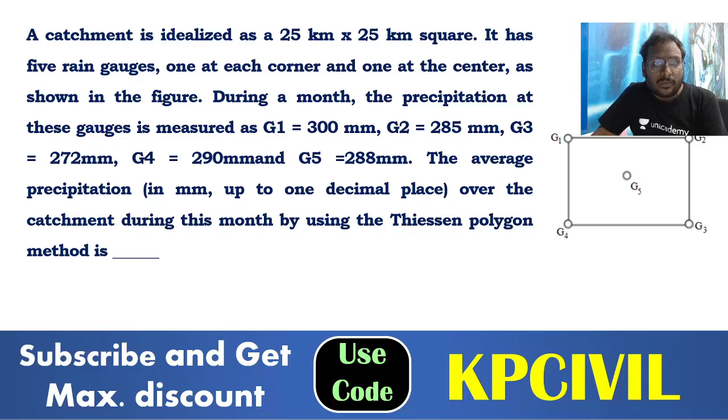2016, 17 and 18 irrigation engineering previous year questions. Why all 3 years combined am I giving? Previously we did each year individually - 2019 one video, 2020 one video we have done. But here we are combining 2016, 17, 18, all 3 years, 6 sets, each year 2 sets. In civil engineering paper, irrigation engineering, across all 3 years combined, they gave only 5 questions from it. So one small video is enough for us. So not individual years, we are doing combinedly. 2016 to 18 irrigation engineering, civil engineering, previous year questions of GATE solutions we are doing.

Coming for the first question, the intensity of irrigation for the Kharif season is 50%. I am writing percentage in fraction, 0.5.

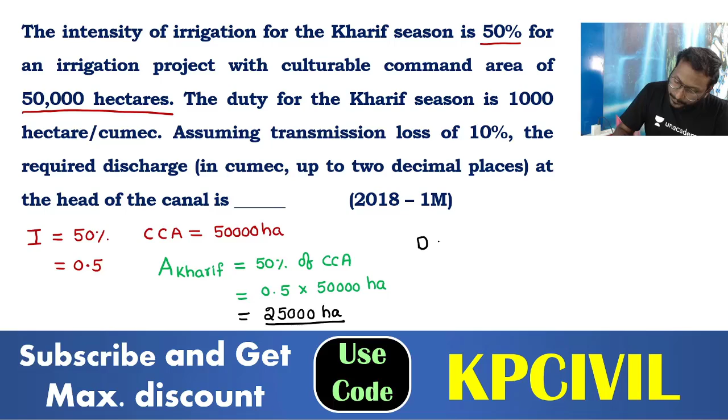Duty for the Kharif season is 1000 hectare per cumec. Assuming transmission loss of 10%, required discharge at the head of the canal - means canal has started the journey. Consider this is the head of the canal. Water is traveling through the canal and delivered at the field. Water started at the head is 100%. During the journey, losses occur because of conveyance losses or transmission losses. The losses may include evaporation loss, seepage loss, runoff loss - these conveyance or transmission losses are given in the data as 10%. So it is delivering 90% at the field.

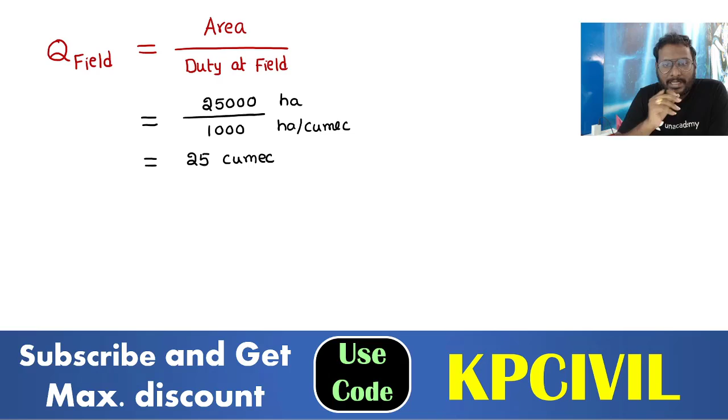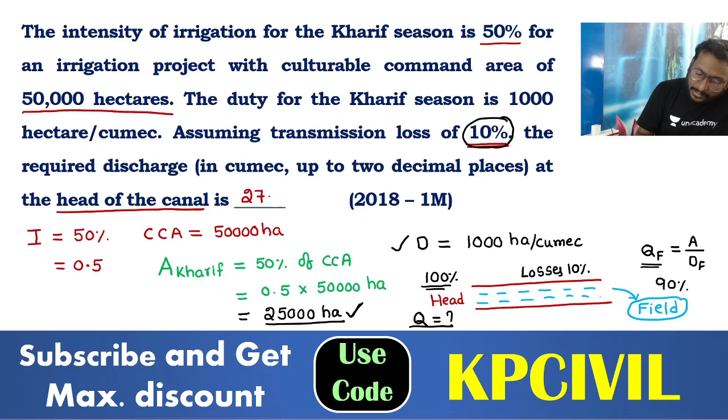Now this Q field is 90% only, which is 25 cumecs. Q head, how much is Q head? Q head is 100%. 90% value is 25 cumec, what is the value of 100%? 25 into 100 by 90 - 90% is 25 cumecs which is discharge at field, 100% is discharge at head. 25 into 100 by 90 will give the answer. Calculate it: 27.78 cumec. So up to 2 decimal places, we need the answer: 27.78 cumec.

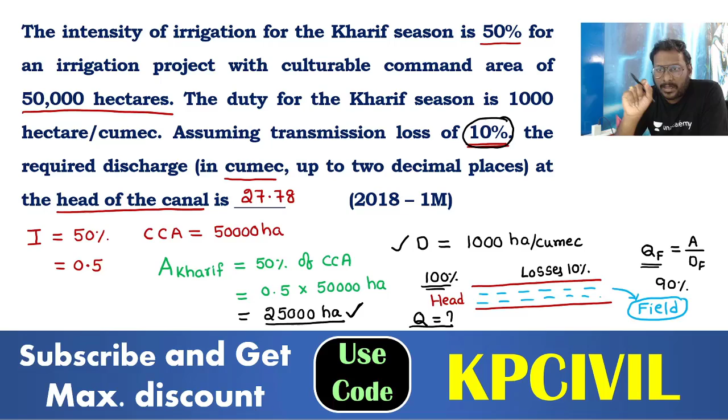Clear? One by one, step by step. First 50% of cultivable command area is taken. Then area for Kharif is obtained. Then analysis: water started at the head as 100 liters, received at the field with loss of 10 liter, so 90 liter. So discharge at the field is equal to area by duty. Then discharge at head is equal to 25 into 100% by 90%, giving 27.78 cumec.

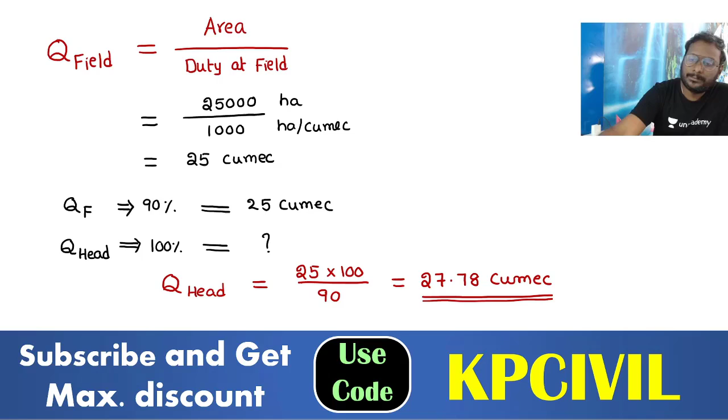Next question. This is 2017, 2 marks question. The previous one was 2018, 1 mark.

Cultivable command area (CCA) of canal is 10,000 hectares. The area grows only two different crops: rice in Kharif season, wheat in Rabi season.

Write down: rice in Kharif season, wheat in Rabi season. Two crops in two different seasons they are cultivating.

Design discharge is based on requirement of rice, meaning it may be highest. Whatever the highest water requirement, that maximum discharge is considered as the design discharge. Maybe rice needs maximum discharge, so it was taken.

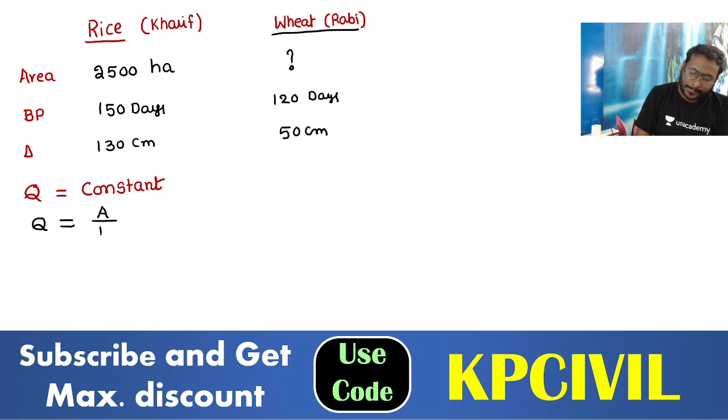We solved the previous question using discharge equals area by duty. Same we can take here also. Discharge equals area by duty. Is duty provided in the data? No, duty is not given in the data.

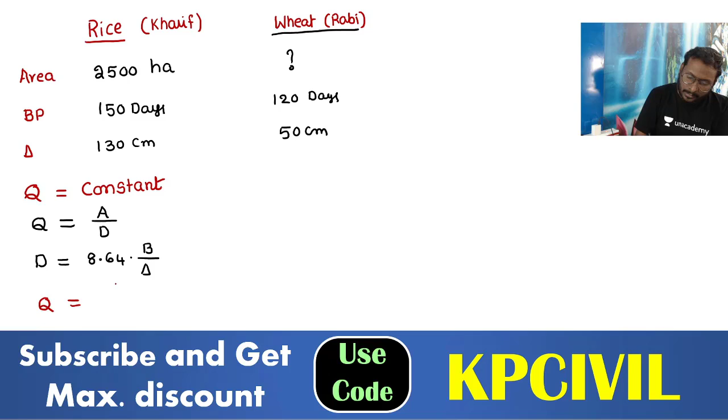So I am taking duty equals 8.64B by delta. Substituting in place of duty: discharge equals A by (8.64B by delta).

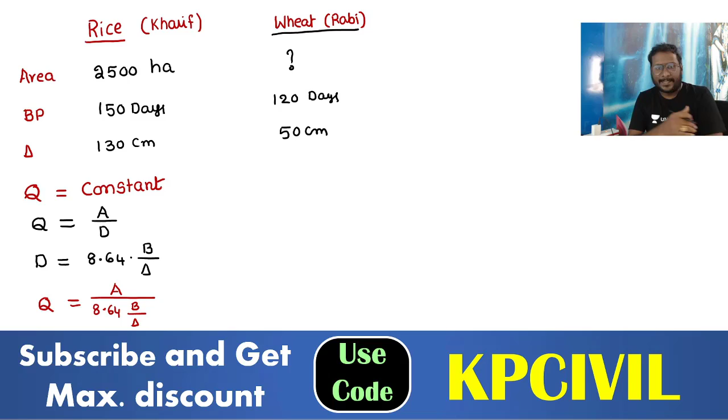So we'll conclude the final formula for discharge: area into delta by 8.64B. Wherever you are solving any question, remember this point carefully. This formula is very important for any question related to irrigation discharge: Q equals A into delta by 8.64B.

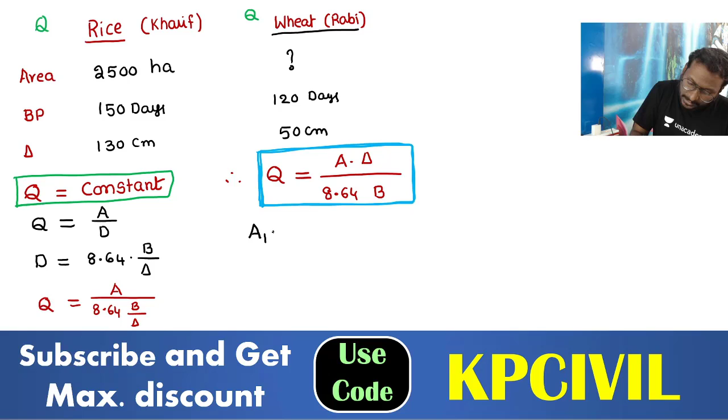But in this question, what is given? Discharge is constant, not varying - meaning discharge for rice equals discharge for wheat, no change. So we'll equalize the discharges: A1 into delta 1 by B1 equals A2 into delta 2 by B2, because 8.64 gets cancelled when you equalize.

If you substitute, you will get the answer. A1 is 2500, delta 1 is 130 centimeters, base period B1 is 150 days, equals A2 required, delta 2 is 50 centimeters, B2 is 120 days. So required is A2 only - we will consider this as required.

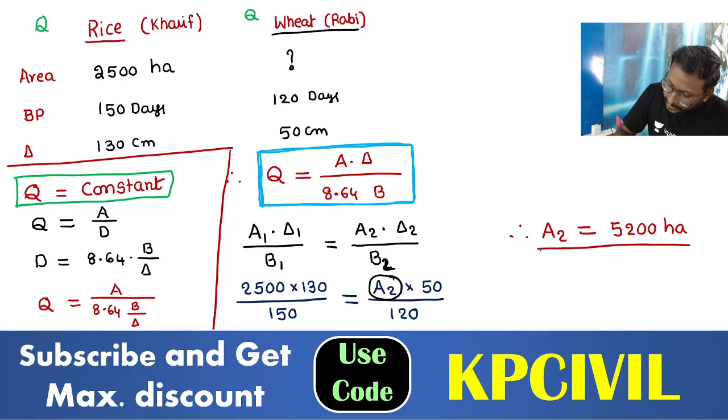Solve for A2 now, and you will easily get the answer using this relationship. A2 equals 5,200 hectares - the area for wheat.

So again this is a fill in the blank, numerical answer type question: 5,200 hectares. Once you understand the formula for discharge, you can easily solve it.

Discharge equals area into depth by time - same formula. Delta is depth, B is base period, nothing but time. So discharge constant: A1 D1 by B1. Easily completed.

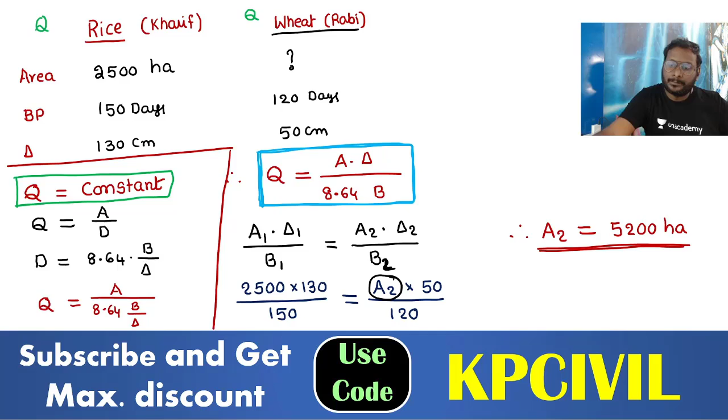Now, the profile of a weir on a permeable foundation is shown in figure 1. This is figure 1 - a weir on permeable foundation given.

Elementary profile of upstream pile only case. This means if only upstream pile is provided, the elementary profile according to Khosla's theory is shown in figure 2. This is very important. What is given in figure 2? Upstream pile only case means there is no downstream pile.

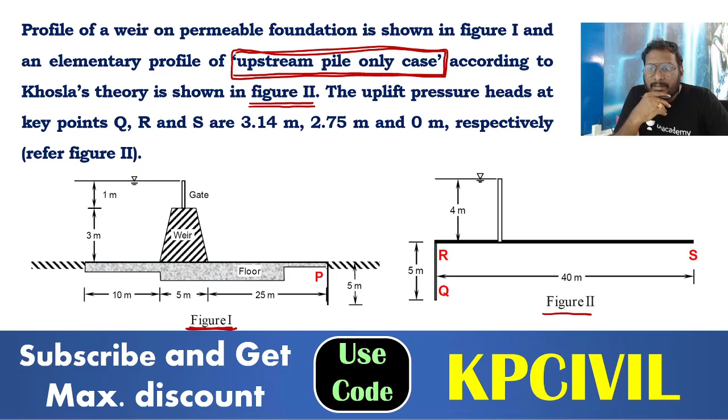The uplift pressure head at key points Q, R and S are 3.14, 2.75 and 0 respectively. So uplift pressure PU at S is 0. At Q, PU is equal to 3.14. Uplift pressure at R is 2.75. Then what is uplift pressure head at point P?

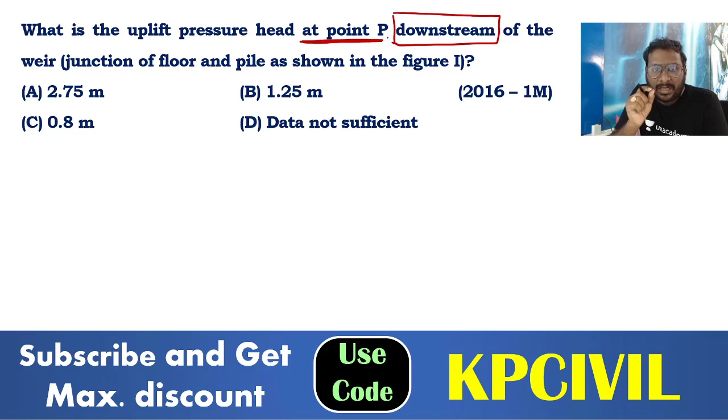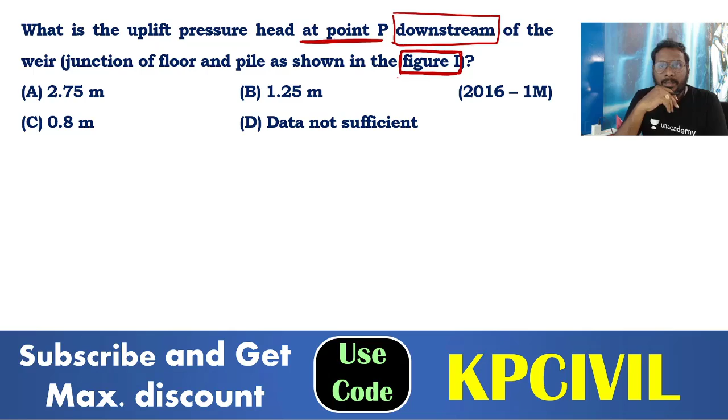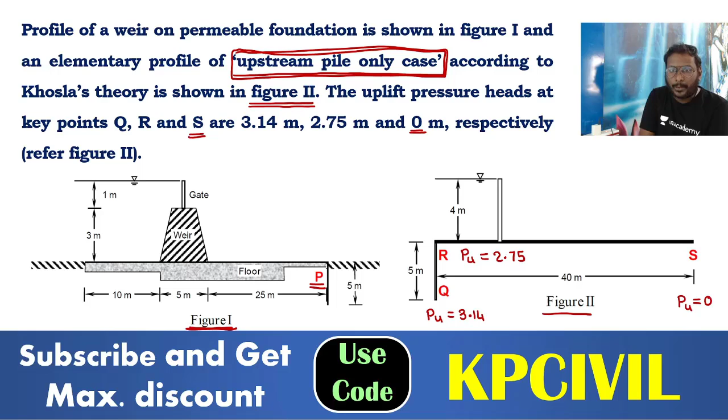Uplift pressure head at point P, downstream of the weir, at the junction of floor and pile, as shown in figure 1 - this location is very important. Where is P located? P is located here at the downstream point. So this uplift pressure at P is related to point R, which is located at the Khosla's upstream pile.

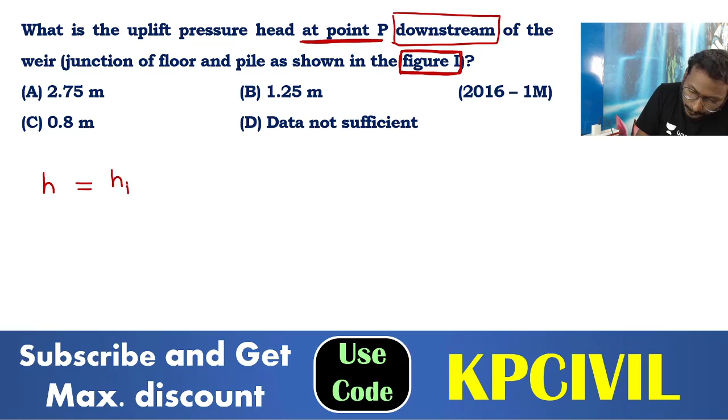So this is H, total head, which is equal to 4 meters. This total uplift head of 4 meters must be resisted by the upstream and downstream piles. Upstream pile resistance is R, and downstream pile resistance is P. So total head H is equal to HP plus HR.

What is total head? 4 is equal to HP, which you need to derive, plus HR given in the data. Q is 3.14, R is 2.75, we'll take that now. So HP is equal to 4 minus 2.75.

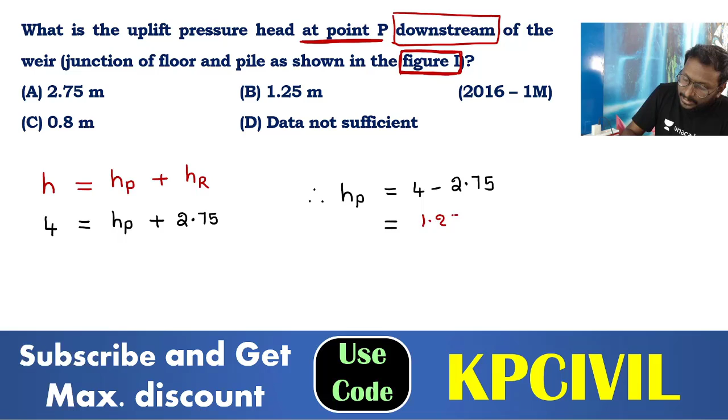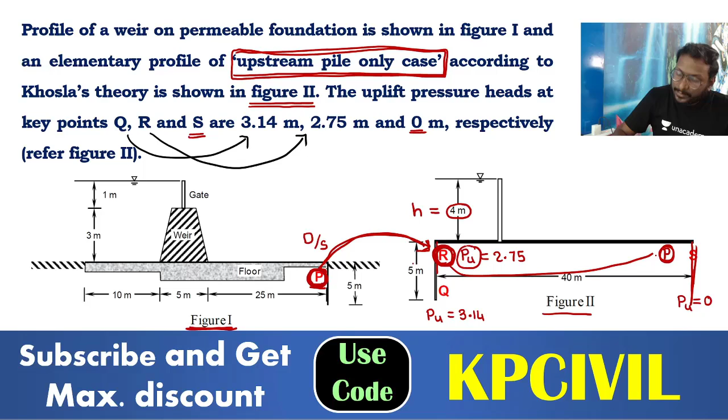Unnecessary data only, but the only thing you need is the concept here. Because this downstream pile P is internal, and I draw it here. So P and R are needed - that's why we take it like that. That is very, very important. HP is equal to 4 minus 2.75, which is 1.25 meters.

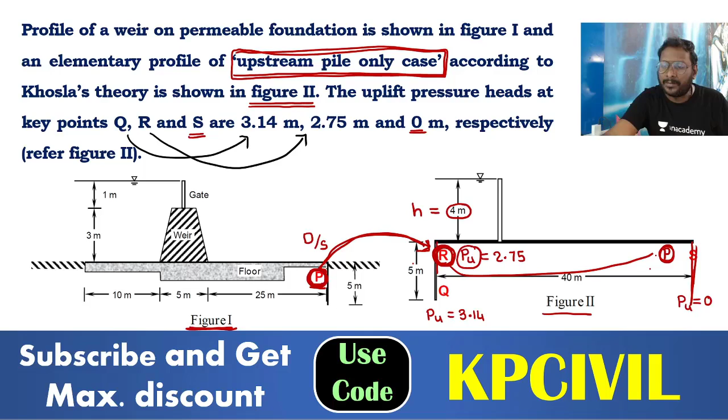So much data - 10 meter, 5 meter, 25 meter - are you going to solve for creep length here? If you are going to solve for creep length, the total 10 meter, 5 meter, 25 meter, pile depth 5 meters - all this is totally unnecessarily provided. Simply total head is equal to HP plus HR, that is taken here.

HP required is 1.25 meter.

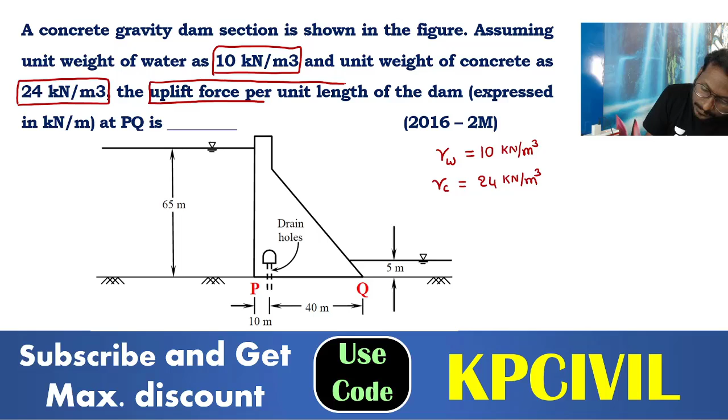The uplift force per unit length of dam, per 1 meter length of dam, total uplift force per unit length of dam at PQ - PQ means base. At base, very important, at base. Total uplift force per unit length of dam - unit length of dam we will take at base, we will consider. First we draw the diagram related to it, whatever is required, only those points we will take and draw the diagram. So this is the point at which the base of the dam is - this is the point at which you need to derive the dam's uplift pressure.

65 meters water head, we will consider here. This is to be taken as capital H.

65 meter capital H. Tail water depth is given as 5 meter. So here consider small h. Tail water depth, take it as small h, 5 meter.

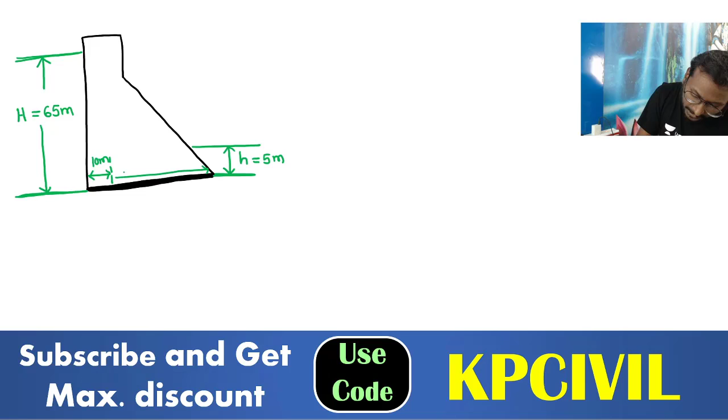Drain hole means drainage area provided. P to drainage area is 10 meter, and after that 40 meter remaining. So wherever drainage area is provided, this is 10 meter, and this total remaining is 40 meter. So this is good, whatever given we have drawn.

For this you need to derive the uplift pressure diagram. So I am taking the uplift pressure diagram for the given case. Because drainage is there, drainage hole is there.

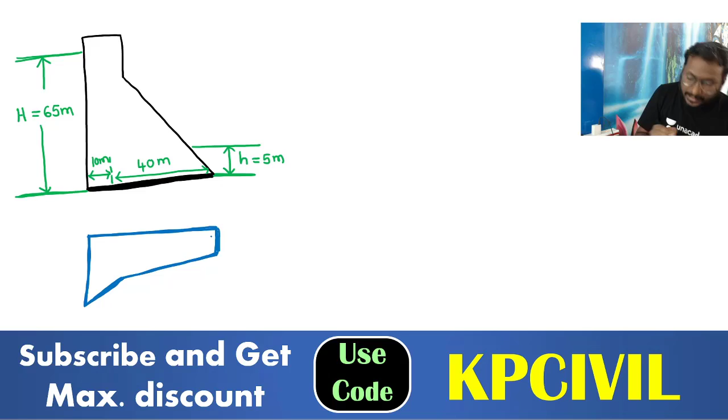Now the uplift pressure diagram will be like this. Up to 10 meters it will be like this, and after that it will go like this. You understand? You have studied this in concrete gravity dam. For the drainage area provided case, we are going to plot this uplift pressure diagram like this.

What is this? This 10 meters, because drainage is up to the drain hole, so remaining is 40 meter. Now this uplift pressure distribution diagram I am dividing into 4 sections.

This is section 1, which is rectangular. Section 2 which is triangular. And another section here, section 3, which is again a rectangle. Section 4 which is a triangle. Total uplift pressure diagram I am providing as 4 sections: area 1 and area 3 are rectangles, area 2 and area 4 are triangles.

What is the height of the section now? We'll take this height. So uplift pressure height, total height, tell me total height.

Gamma W into H. What is gamma W? Gamma W is 10 kilonewton per meter cube. Given height is 65 meter. Gamma W into capital H, height is 65 meter, so 65 into 10 I will take as 650.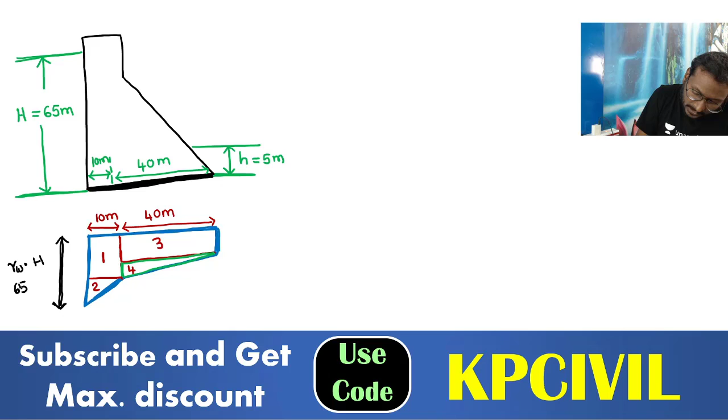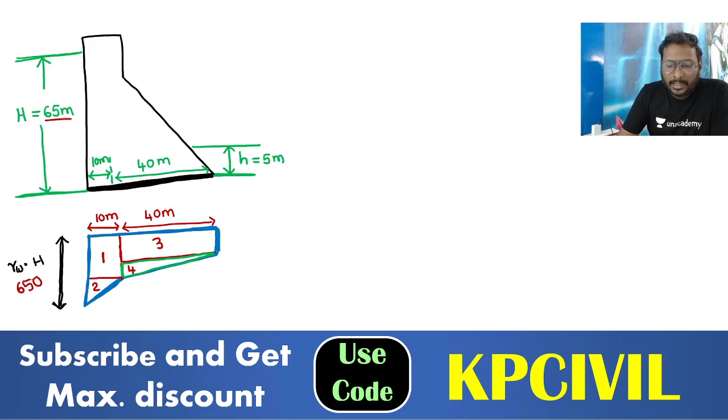Got it? Why am I taking 650? Height is 65 meter, gamma W is 10, so I am taking the height as 650 kilonewton per meter square. That is the total height.

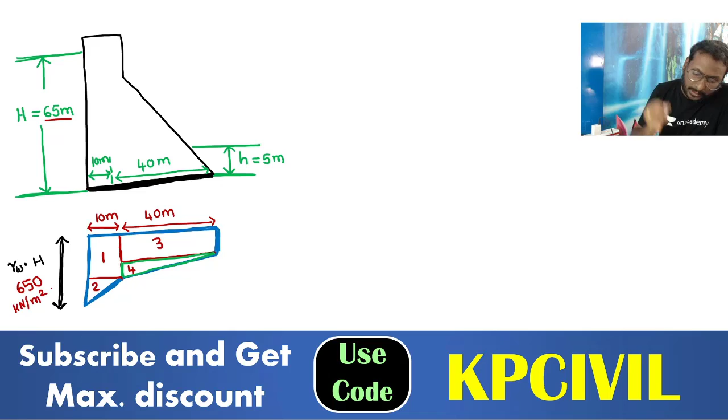Now I am taking this height. What is small h here? Gamma W into small h, 10 into 5, that is 50 kilonewton per meter square. Tail water depth is 5. So gamma W into small h, 10 into 5, 50 kilonewton per meter square.

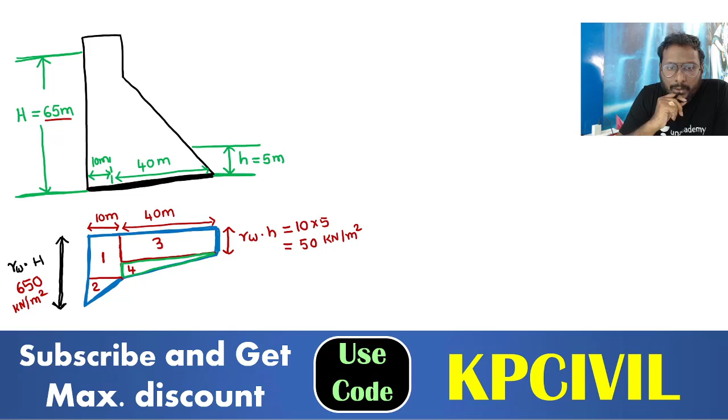So you will get area 3 using the rectangle formula. To get area 1, area 2, area 4, it is difficult. You want to understand area 1, area 2, area 4. For that, what do you need? This height is important.

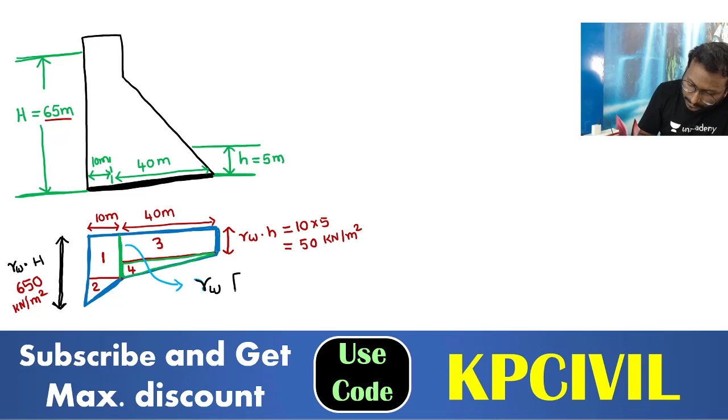So I am taking this total height here. How can we calculate the total height? This total height will have a formula. Do you remember? Uplift pressure head formula at the drain hole: gamma W into small h plus capital H minus small h, divided by 3.

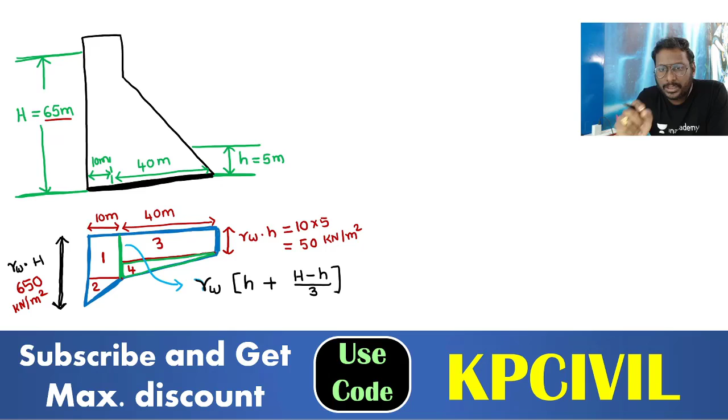Gamma W into small h plus capital H minus small h by 3. That is 10 into small h 5 plus capital H 65 minus small h 5, by 3. 10 into 5 plus 60 by 3. 60 by 3 is 20, 20 plus 5 is 25. 10 into 25 is 250 kilonewton per meter square.

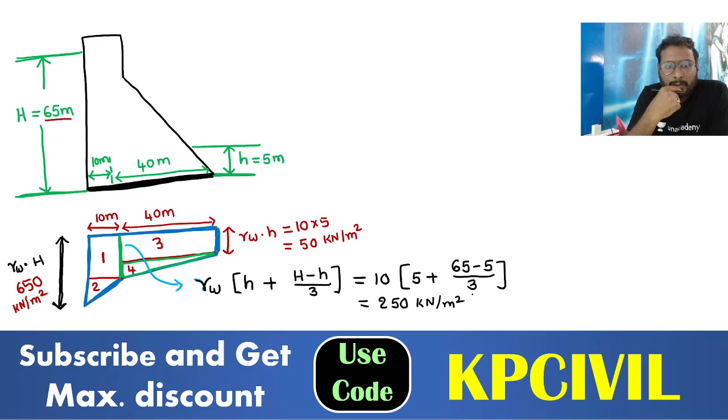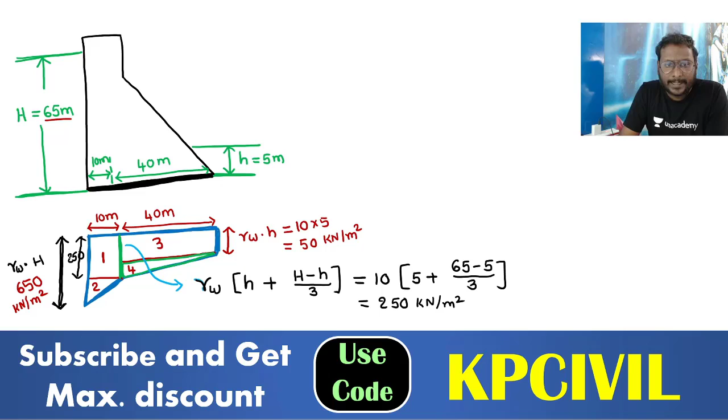So what is this height we can take? This height we can consider as 250. Clear? You can get area 1 now. Area 1, write down: A1 is equal to base into height.

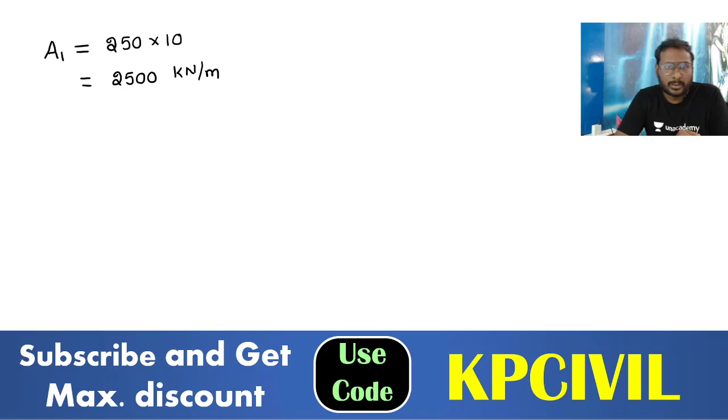Height is 250, base is 10 meter. So area 1 is equal to base into height, 250 into 10, which gives 2500. What is the unit? Kilonewton per meter, because 250 kilonewton per meter square multiplied with 10 meter becomes kilonewton per meter. That is A1.

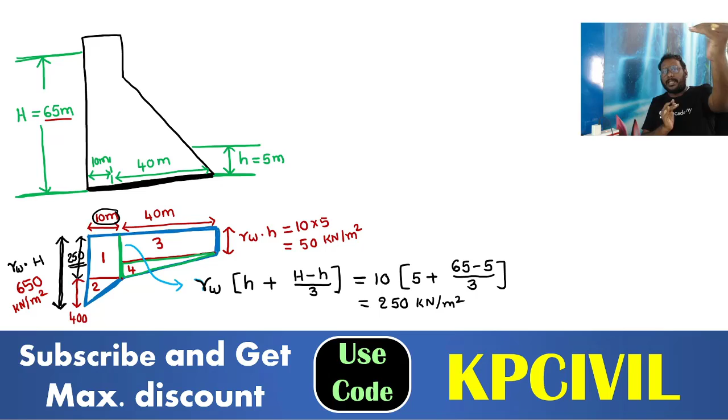Now I am going to A2. What is A2? A2 is a triangular section. What is the remaining height of the triangle here? Remaining height of the triangle out of 650, 250 taken by 1, 400 remaining. So area 2 half BH.

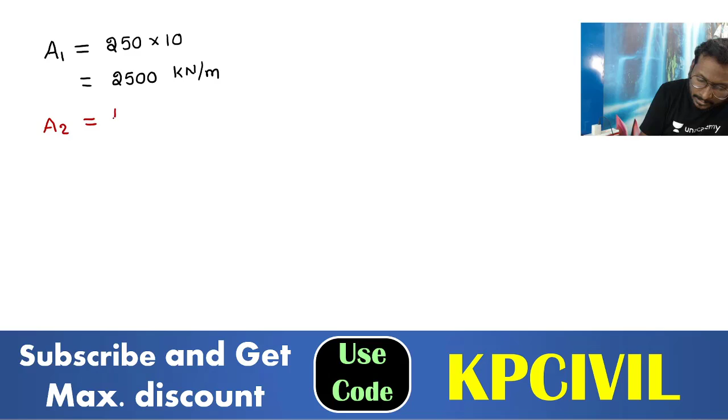Triangle section I will take half BH. Half into B is 10 meter, H is 400. Half into 10 into 400. So 2000 kilonewton per meter.

Triangular area half BH, second one we have taken. A3. Again rectangle, A3 is again rectangle. Height is 50, base is 40, BH. Again we'll take 2000 only, same 50 into 40. 50 into 40 will get 2000 kilonewton per meter.

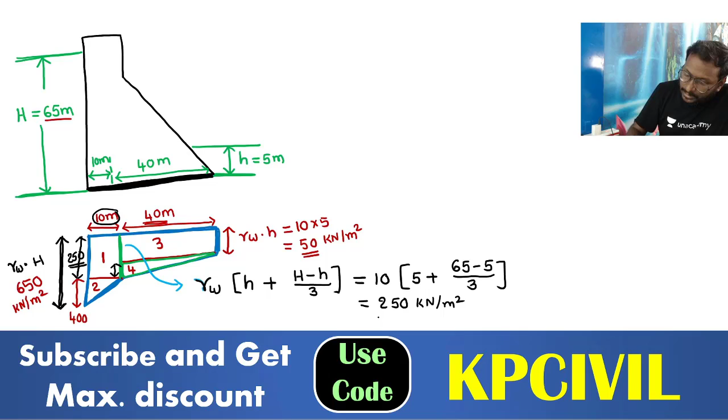Done. Now A4. A4 is needed. This triangle, what is the height? Total height is 250. 50 is given up to this, means this much. 250 minus 50 is 200. 200 is height, 40 is base.

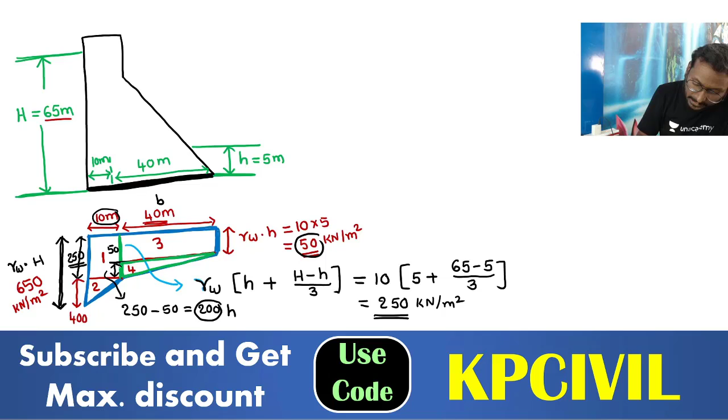What can I take now? 200 into 40, tell me. It is a triangle, not rectangle. Fourth one is a triangle. So half BH we can take. Half into 40 into 200. 4000 kilonewton per meter.

So now what you can derive? A1 is 2500, A2 is 2000, A3 is 2000, A4 is 4000. What are these values representing? These values are giving you individual uplift pressures.

Total uplift pressure is - what is total uplift pressure? Tell me. When you take total uplift pressure, sum A1 plus A2 plus A3 plus A4. Total uplift pressure will take A1 plus A2 plus A3 plus A4. Simple.

2500 plus 2000 plus 2000 plus 4000. So what is your final answer now? Tell me. 2500 plus 2000 plus 2000 plus 4000 equals 10,500. 10,500 kilonewton per meter. Completed now?

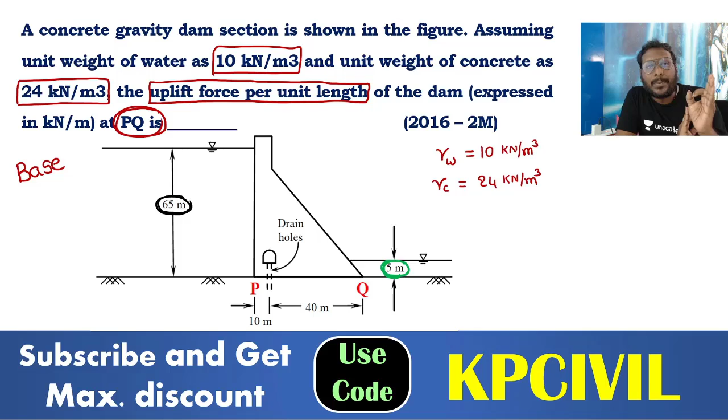Any difficulty in it? The only thing you have to understand is the uplift pressure diagram. If you know this uplift pressure distribution diagram and determination of heights, the question is easily completed. Answer is 10,500 kilonewton per meter.

Group 1 contains 3 broad classes of irrigation supply canal outlets - canal outlet. Group 2 presents hydraulic performance attributes. Okay, match the following, we need to match it. Non-modular outlet, semi-modular outlet, modular outlet - 3 given. The correct match for these items in group 1 with items in group 2.

Non-modular outlet. What is non-modular outlet? You tell me, what is the differentiating factor for the outlets, canal outlets. Whether it is depending upon inlet or outlet, whether it is depending upon supply canal or receiving water course. You understand? Example, there is a supply canal, consider this is a supply canal.

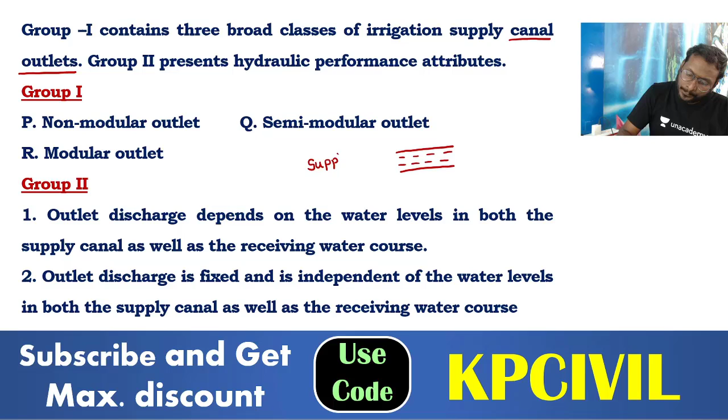So supply canal will consider it as inlet. Supply canal is head or source we will take. Receiving canal is located here - receiving water course is located there. Now, in between supply canal to receiving water course, you are providing an outlet. This is an outlet you provided. This is a receiving water course.

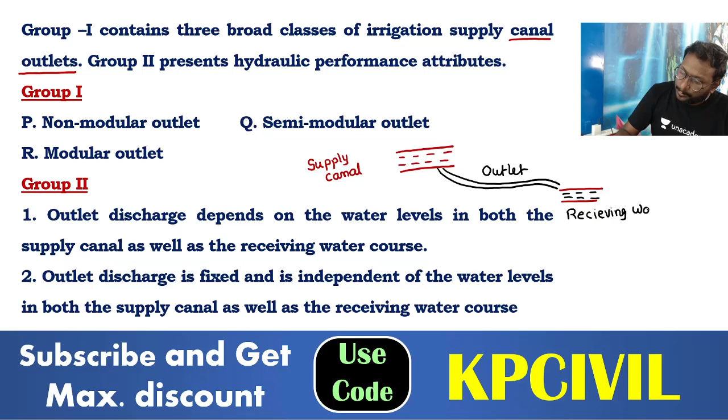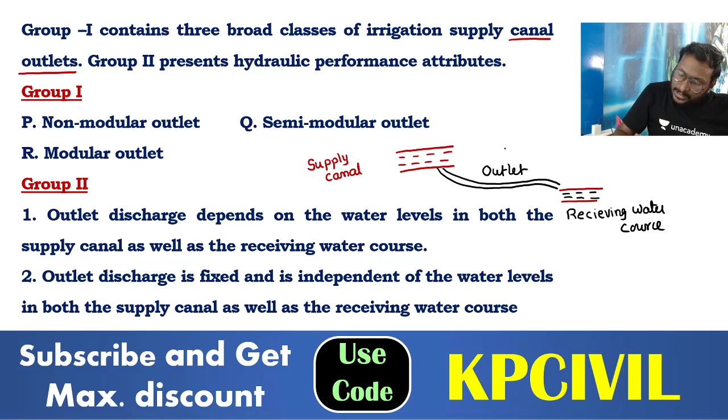Receiving water course. So depending upon type, on what is it depending? Discharge is depending on whether it is depending on supply canal or it is depending upon receiving water course. We have differentiated, you understand? Discharge of the outlet either depends upon supply canal or depends upon receiving water course. On that point, we have classified into 3 types.

Non-modular. Discharge of outlet is depending upon both supply canal and receiving water course, both. Non-modular is depending upon both supply canal as well as receiving water course. I am writing supply canal as SC, receiving water course as RWC. For non-modular outlet, it is depending upon supply canal as well as receiving water course.

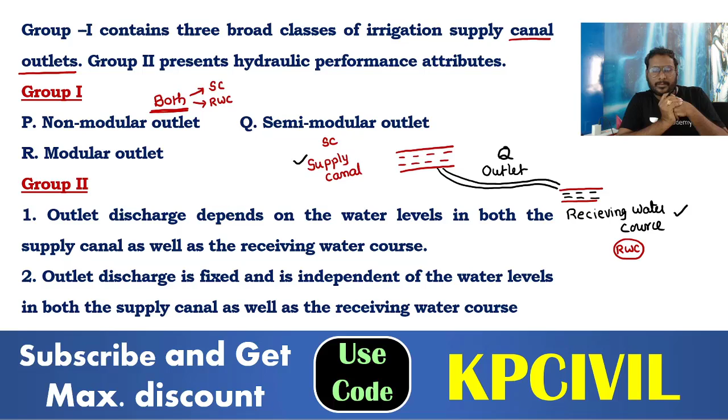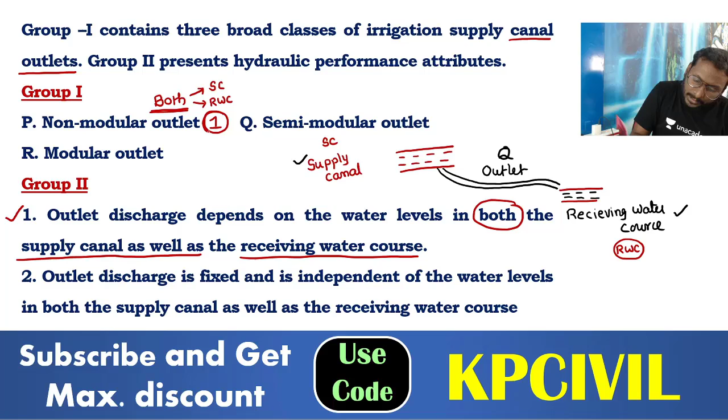We will check the options. Outlet discharge, group 1, group 2, first one: outlet discharge depends on the water levels in both the supply canal as well as receiving water course. Both given, both. So non-modular outlet P is equal to 1. So we'll check how many options are there. We have two options, A and D. If we have one option, our question is completed, but it is carrying two options, A and D.

Semi-modular outlet depends only on the supply canal. It is not depending upon the receiving canal. Semi-modular depends only on the head of the supply canal. Outlet discharge is fixed and independent of water levels in both the supply canal as well as the receiving water course - no, that's wrong. Semi-modular outlet discharge depends upon only the water level on the supply canal.

Correct? Water level on supply canal. So it is Q. It is P. One is P, Q is 3.

Q is 3, then modular. Modular is fixed, rigid only - not depending, independent. So non-modular is depending on both. Semi-modular is depending on only supply canal. Modular is not depending on anything, independent. What is remaining? Remaining is 2 only, we can write now.

So outlet discharge is fixed, independent - clearly given, independent of water levels of both supply canal and receiving water course.

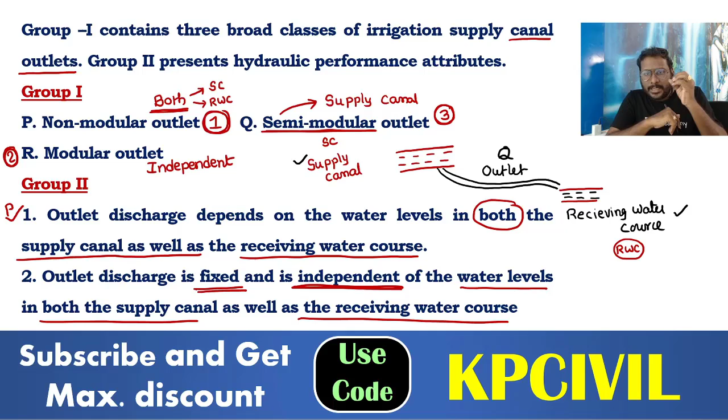3 points I will tell you, just I will brief you. A canal outlet is going to take water between the supply canal and the receiving water course. Clear? How much outlet discharge is it going to deliver at the receiving water course?

If it is depending upon both the supply canal and receiving water course water levels, that is called a non-modular outlet. It is depending upon source, meaning supply canal only, not depending upon the receiving course - that is semi-modular. It is not at all depending.

Outlet discharge, once you given the diameter, it is not changing. For example, it is a rigid modular fixed pipe. Can you change the discharge in the fixed pipe? Not possible - fixed pipe, rigid modular, it is not possible to change the discharge. Whatever the source gives, whatever the receiver requires, not depending upon the source, not depending upon the requirement, not depending on supply, not depending upon demand. Depending only on pipe diameter, it is fixed, independent.

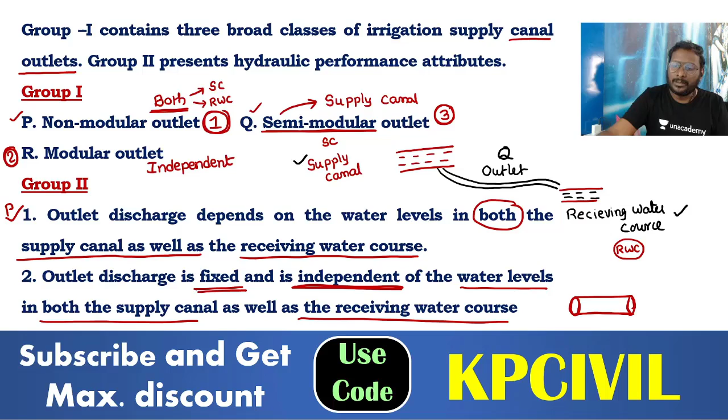So what is our answer now? P1, Q3, R2, D. Completely conceptual question. Okay? Clear?

So these are the 5 questions given between 2016 to 2018, 3 GATE papers. I think, hope you enjoyed the PYQ sessions. Irrigation 5 years PYQs I have finished.